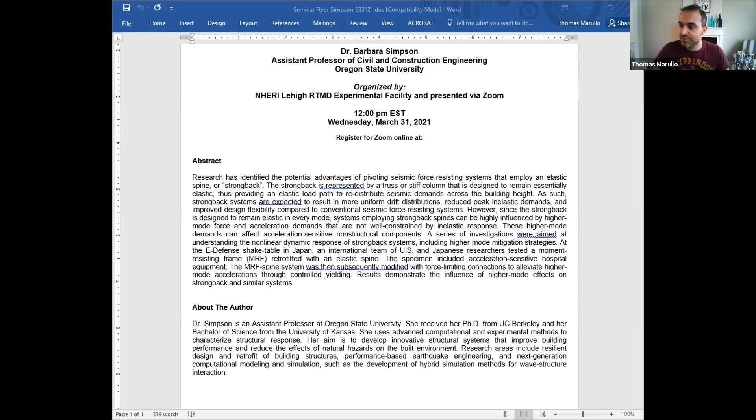Okay, let's try this. How about this? All looks good on my end. Awesome. So thanks so much for the introduction.

I'm going to be talking about a system that's rather near and dear to my heart. I've been working on it for quite some time. Today we're going to chat about higher mode force demands in systems employing elastic strongback spines. I tend to default to calling these systems with a strongback, but they're known by a number of different names depending on who you talk to, since there are a lot of other researchers also looking into this topic.

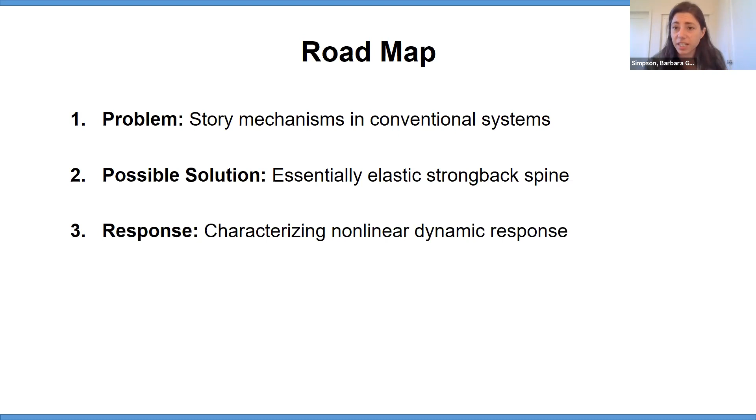To give a roadmap of what this presentation will cover: we're going to introduce the problem of story mechanism behavior, framed in terms of brace frame systems, though this is an issue seen in a number of other systems as well, as we'll see throughout. Then we'll look at a possible solution, which is where this Strongback concept comes in—I'll switch between calling it a Strongback and a spine depending on which project I'm introducing, since a lot of different research has looked into this topic. Then we'll characterize the nonlinear and dynamic response of these systems, particularly in terms of higher mode effects, and discuss ongoing research and applications of the system outside of how it was originally developed. So let's look at this first part: the problem of story mechanism behavior.

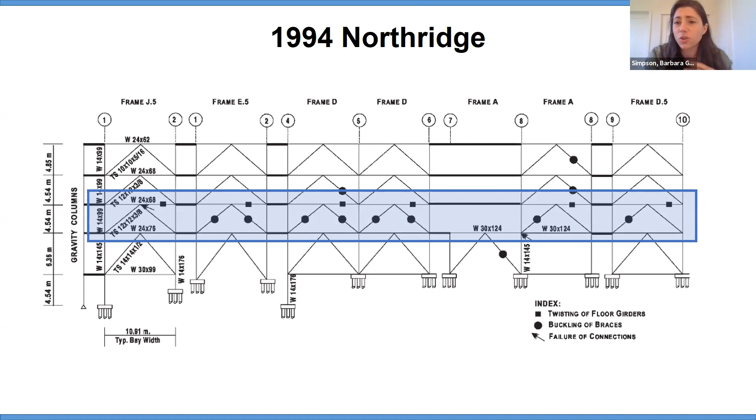This is a building with observed damage after the 1994 Northridge earthquake, a very conventional brace frame system. All these dots represent some sort of inelastic response, in this case brace buckling mostly, as well as some connection failures. Almost all of these dots are concentrated in the second story. This is pretty indicative of what we call story mechanism behavior, where you're utilizing the energy dissipation capacity of one story but not leveraging the energy dissipation in all the other stories of this 4-story building. This was the premise, if not the only reason, for this research project—developed during my PhD days.

When I originally started my PhD working with brace frames, it was still NEES rather than NHERI. This was a collaborative research project looking into vintage brace frames and their vulnerabilities. From this project, I became interested in story mechanism response and how to mitigate it. Throughout this project, we tested a number of brace frame specimens typical of vintage brace frame construction—those designed prior to the 1988 Uniform Building Code.

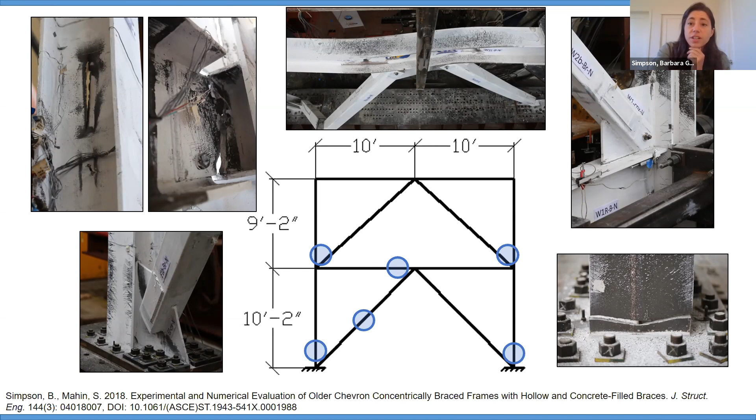This was the first test we did, a 2-story conventional brace frame test. We saw a number of different damage states and types of deficiencies. But something I want to point out is that when we did this test, most of the damage was concentrated in the first story—again, fairly indicative of a first story mechanism.

We did two sorts of vintage brace frame testing. If the first specimen formed a weak first story, the second specimen we tested—almost identical to the first, except we filled all the braces with concrete—gave us a weak beam mechanism where again almost all the damage was concentrated in the first story. This story mechanism behavior was really the precursor to a lot of the work I'm going to present today.

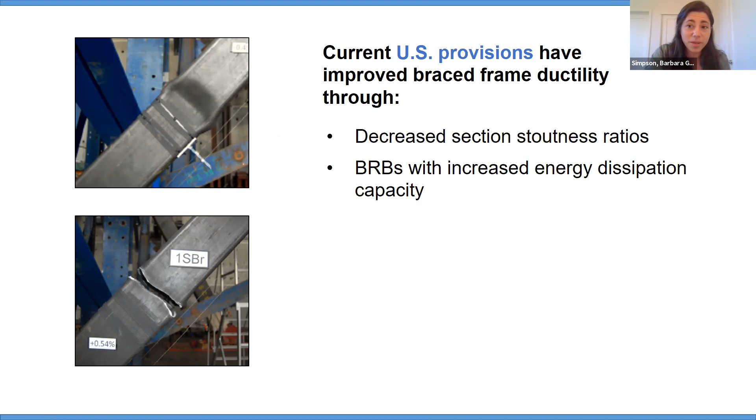If we take a step forward from vintage brace frame construction into modern US provisions for the seismic design of brace frames, we've done a lot. There's decreased section stoutness ratios to delay or even prevent severe local buckling and fracture. We've introduced buckling restrained braces, which have more stable energy dissipation capacity compared to braces that buckle. We've improved the detailing of our gusset plates to allow braces to buckle out of plane. We've also developed simplified capacity design procedures for more realistic estimates of member forces due to brace buckling and yielding.

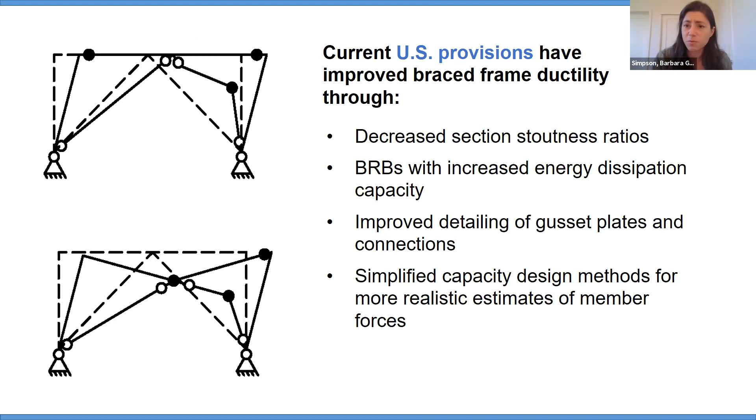And yet there's still this issue that brace frames, as well as other modern systems, despite these number of different improvements, still tend to form story mechanisms where the damage is concentrated in one or a few stories.

That's where this possible solution comes in—this idea of the elastic Strongback spine, which was really the brainchild of my advisor, Dr. Stephen Mahin, who actually passed away during the course of this research when I was doing my PhD. He, as well as others, had recognized that there were a number of different ways we could mitigate this story mechanism behavior and mobilize the full energy dissipation capacity of the entire system.

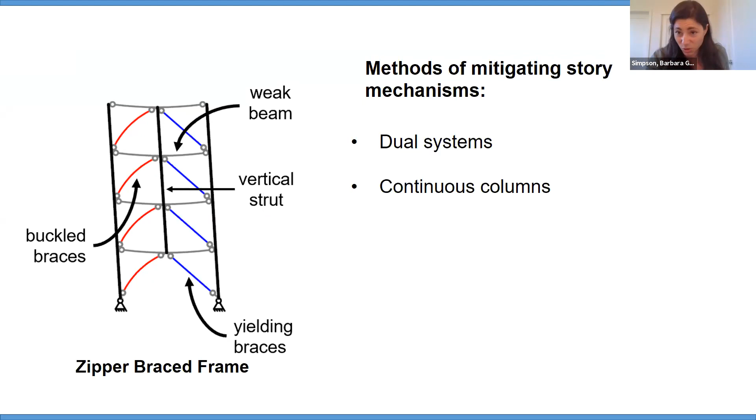If you look in the literature, there are a number of different ways that people have approached this problem. There are dual systems where you can use a secondary system to apply some elastic restoring capability. There's the continuous column concept, where a continuous column spanning over the height of a building—either a gravity system or something different—can span over the story mechanism problem. You could think of steel plate or concrete shear walls as a stiff, elastic vertical element that imposes a more uniform drift distribution, thereby delaying these story mechanisms, rocking and self-centering systems.

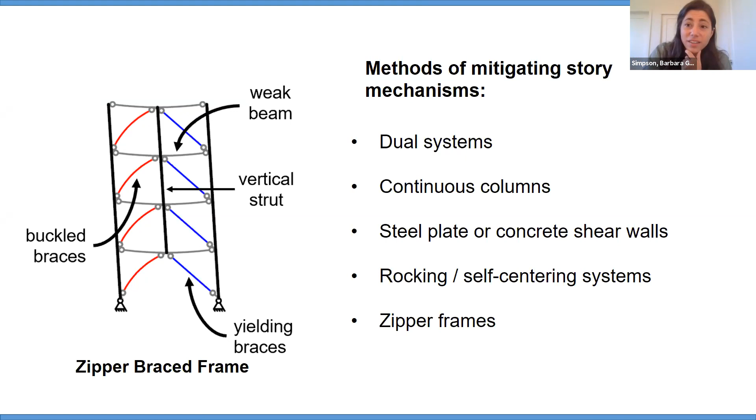The one on the right is sort of a precursor to what I've been calling the Strongback brace frame, but it's a zipper frame, which leverages the idea of a weak beam and a vertical tie strut. As the braces yield and buckle, it pulls down on this vertical tie to engage adjacent stories. So those were different ways that researchers have approached this story mechanism problem.

It's useful when introducing the Strongback system to think about why story mechanisms form. Let's take a brace frame, and let's say that each brace in every story has an equal strength or compression capacity C and an equal stiffness—the same braces used throughout the story—and it's subjected to some sort of seismic or inertial loading, let's say in this case an inverted triangular distribution.

When the braces in the story buckle, you're going to get a loss of both strength and stiffness in that story. Unless there's an appropriate mechanism to distribute these demands from the columns, those demands tend to concentrate in a single story and potentially lead to a story mechanism behavior. That's the reason why these story mechanisms are so prevalent in these brace frame structures.

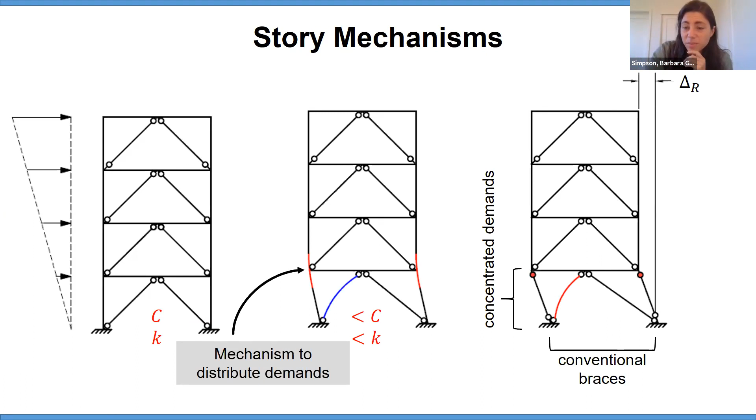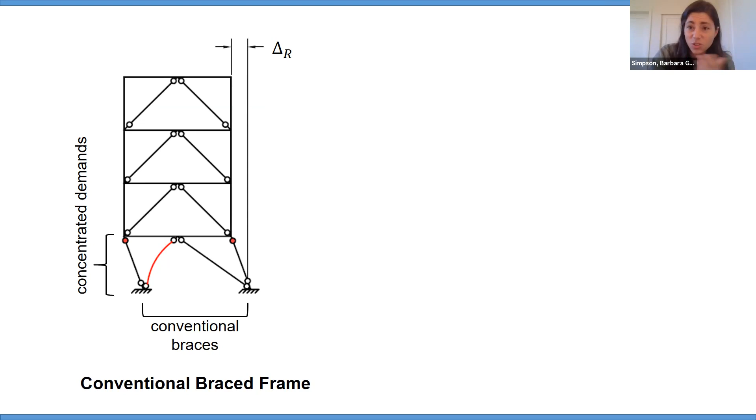This concept of a conventional brace frame has this tendency to form a story mechanism due to brace buckling behavior. The Strongback system introduces an essentially elastic mechanism that provides an elastic load path to distribute demands. This gray box area is a portion of the brace frame system that we're going to design to remain essentially elastic, and it's able to distribute the demands across multiple stories.

So instead of, on the figure on the left, 100% of the damage concentrated in one story, we utilize this elastic mechanism to distribute the demand across all 4 stories. Now you're getting a quarter of the damage distributed across this 4-story building. That's the concept of the Strongback brace frame.

Outside of that elastic Strongback, you design and detail the elements to yield and dissipate the seismic input energy. How the Strongback brace frame has traditionally been formulated is that you have these primary fuses, which could either be yielding or brace buckling behavior, as the primary energy dissipation mechanism. You could also have secondary fuses, for example flexural yielding in these longer beam lengths, that provide some secondary energy dissipation.

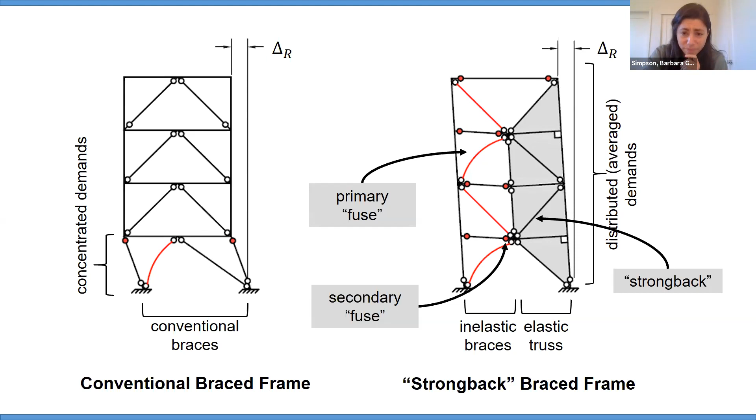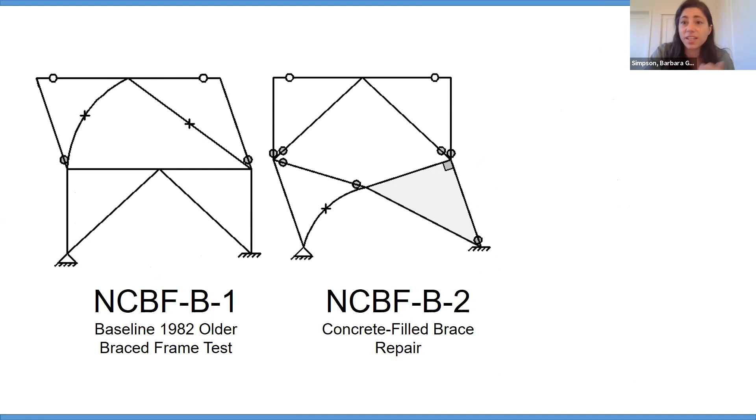Going back to this original research into these vintage brace frames, we had a first test that formed a second story mechanism, a second test that formed a first story mechanism, and the idea of this third test was to introduce this Strongback concept to distribute the demands over both stories. This gray triangle is what we're envisioning as the Strongback retrofit scheme.

How the Strongback works, if we look at it in terms of its kinematics: this gray box, the Strongback, is designed to remain elastic. Initially it was formulated as this sort of pivoting type motion, where this gray box pivots back and forth, with some primary energy dissipation. In this experiment, we were using buckling restrained, a single buckling restrained brace.

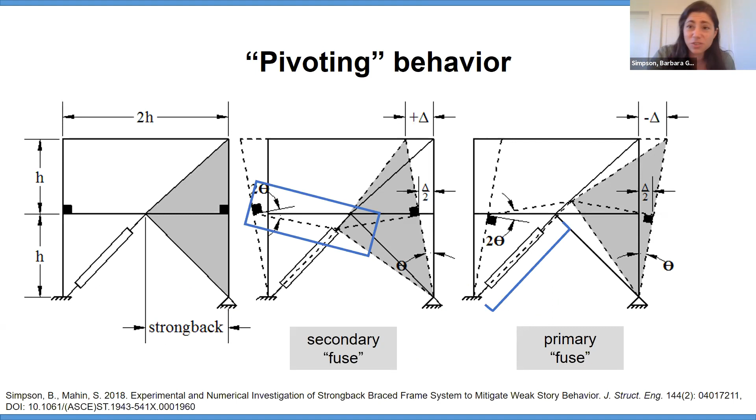Because that pivoting motion induces a vertical deflection in the beam, you could also say there's a secondary fuse in terms of flexural yielding in this beam length. We built and tested this at full scale, and this figure on the right shows that pivoting motion.

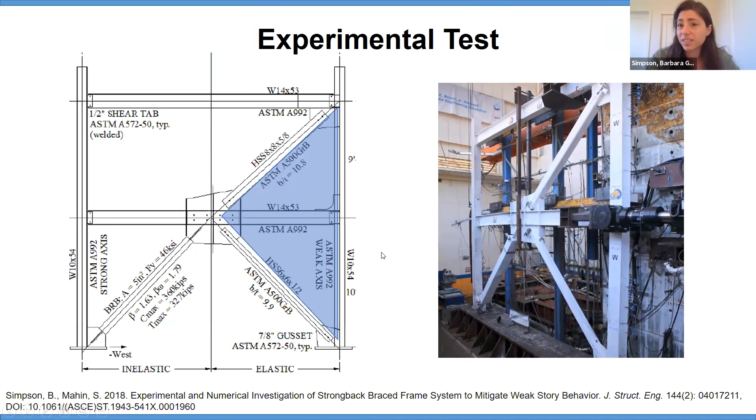We were successful in distributing the demands across both stories and achieving a more uniform drift distribution. So in that respect, this experiment was rather successful, and here we're seeing this Strongback, this elastic portion of the frame. This was a result of a number of different collaborations.

The vintage brace frame experiments were part of a much larger collaborative research program between Berkeley and the University of Washington. I happen to be the PhD student at Berkeley, and Andrew Sen was another PhD student at University of Washington. From this, there became interest in how we look at this system in terms of design development. AISC also became interested in this project.

That leads into the second portion of the research: how do you characterize these force demands in the Strongback spine? The reality is that the previous experimental test, although valuable in introducing the concept and showing it was successful in distributing story drift demands more uniformly within the building, didn't actually look at the dynamic response. It was tested in a quasi-static way, with no inertial effects, etc.

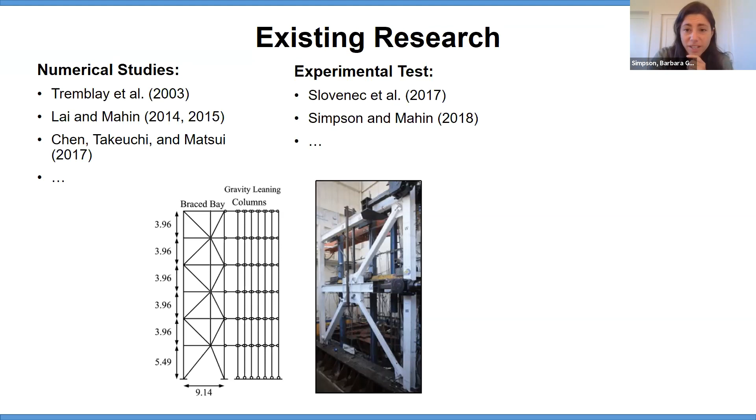There were some hybrid simulations conducted on a similar system, and then the experimental test I just introduced on this two-story Strongback system. At the same time, they were building and constructing very similar systems—this one's called the Masted Frame. You can see it looks very similar to many of the images I've shown so far, by tipping structures in Berkeley, California. So we were having numerical analyses, experimental testing, and construction happening simultaneously.

But there were still these really large questions on how these systems behaved, not only in the inelastic range, but in terms of their dynamics. It turns out that when you look at the response of these systems, they behave quite a bit differently compared to traditional conventional systems that are designed to be ductile and exhibit inelastic behavior in every mode. So this was a major question for us.

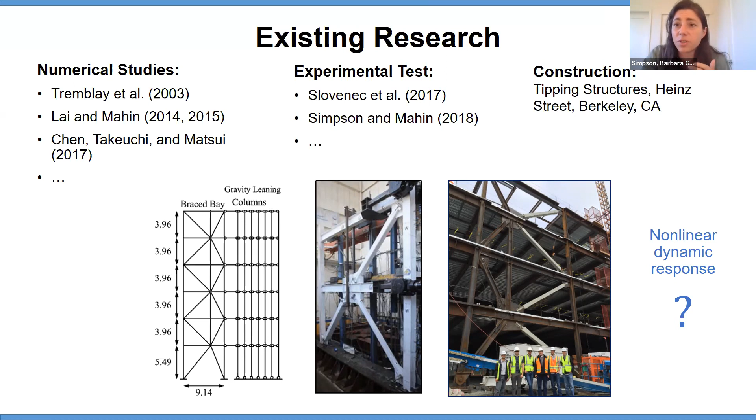I like to describe this with these figures. I didn't actually develop these figures myself—they're from a seismic design course taught at UC Berkeley by Steve Mahin. I've leveraged some of these images in presenting this idea, but this is not a new concept of looking at force demands in the elastic components, or the force-controlled actions, of a system.

Here, for example, we have a moment resisting frame where the plastic mechanism is typically flexural yielding at the ends of the beams, as well as potentially at the column bases. This moment frame is subjected to an inverted triangular distribution, and if we're interested in the moments in the columns, well, we know the flexural strength of these beams, so we can get the column moments.

However, during an earthquake, if those applied forces change, the moments in the columns will also change. As the inertial forces change again, those column moments also change again. So the elastic regions really may not be well constrained by flexural yielding or the formation of these plastic hinges. What you could potentially do is run a number of different nonlinear dynamic analyses for a number of different ground motions, collect them statistically, get their median values, and design for some statistical level of confidence for the moment in the columns to keep them elastic.

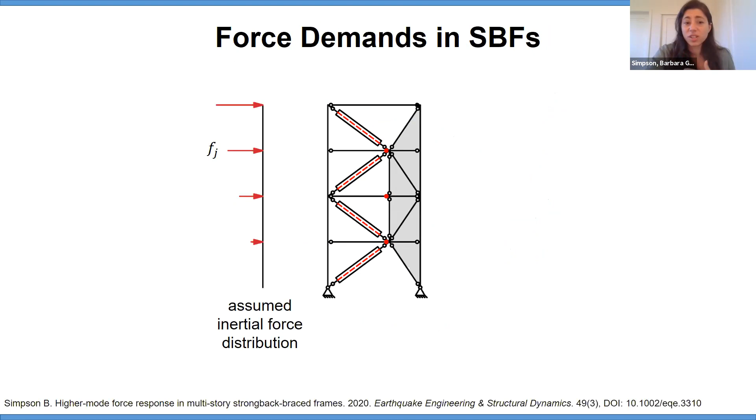That's the example of force demands in a conventional system that we very much know. The same idea can be extended to this Strongback system. If you take this Strongback system, you can apply some assumed inertial force distribution, resulting in some story shear demand. If we do a section cut through this Strongback brace frame, the forces in this Strongback brace, denoted by PSJ, will be some combination of whatever the inertial forces are in terms of story shear, and whatever forces are in the opposite—I call these typically nonlinear braces.

So the brace that's considered to be yielding in this case—what you can say is that the force in the Strongback brace is coming from a combination of story shears developing during the ground shaking from the inertial forces, as well as whatever axial force demand is developed in the opposite brace. Keeping that in mind, as that applied force distribution changes, the story shears will consequently also change. Even if that brace force is at its expected yield strength, if it's a BRB, the forces in the Strongback brace will also change. And if those forces change again, those story shears would change again, and the forces in the Strongback brace change again.

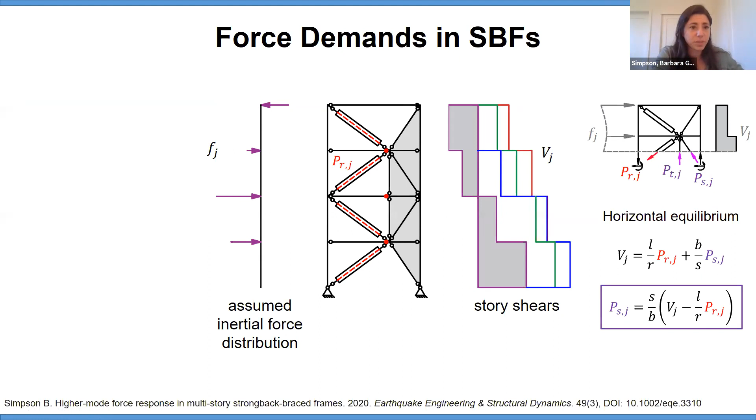What you end up seeing is that the force demands that are most significant, or could be most significant, in the Strongback portion of this system are actually ones that correspond to a force distribution where there's a reversal in the force. Here, there's a reversal of the force at the top story, or top floor level, which is typical of, say, a second mode distribution. So what you tend to see is that the higher modes actually play a very dominant role in the forces in the Strongback.

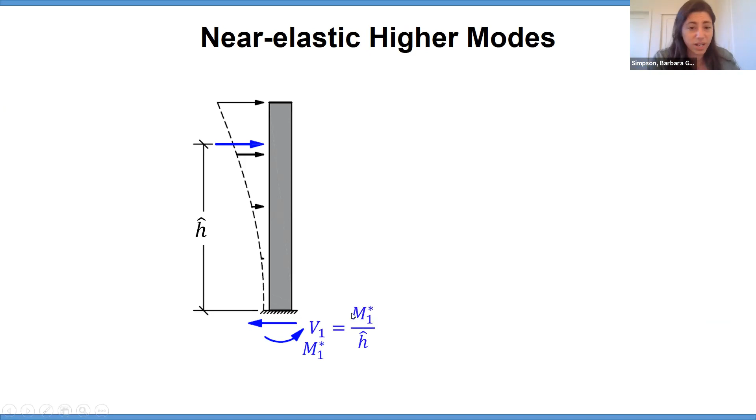There are a number of ways to explain this. I prefer this approach using a concrete shear wall. If we take a concrete shear wall with a first mode-like inertial force distribution, and have it form a plastic hinge about the base of the wall while the remainder stays elastic, then the moments at the base are constrained by the strength of that flexural hinging, and the base shear is that moment divided by the height from the base to the force resultant.

Now, if that inertial force distribution changes, say due to contributions from second or higher modes, that force resultant shifts downward because the second mode in particular tends to be associated with force reversal. Even if the moment at the base of the wall remains the same, because we're still getting flexural hinging at the base, the height to that force resultant becomes smaller, meaning the base shear can become larger.

So even though the moments at the base of this wall are well constrained by flexural yielding, the base shear, and even the story shears, are not so well constrained. Even the moments above the base are not well constrained. That's the same principle happening in the Strongback system.

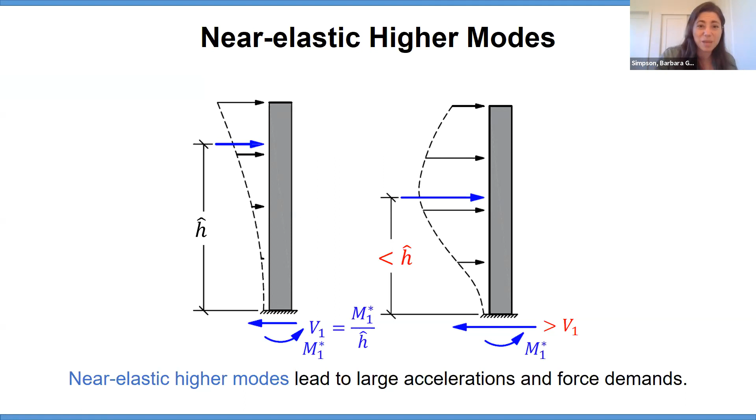In the first mode, you get limited forces due to the yielding mechanism—primary yielding in the braces, or secondary yielding in the beams—which limit the forces in the first mode. However, that nonlinear mechanism is not necessarily limiting the forces in the second and higher modes.

As you make this Strongback more and more stiff, you get an averaging of drift demands with story height. The tendency for a story mechanism to form, or for the system to concentrate damage and demands in a single story, is reduced, and you get a more uniform drift distribution.

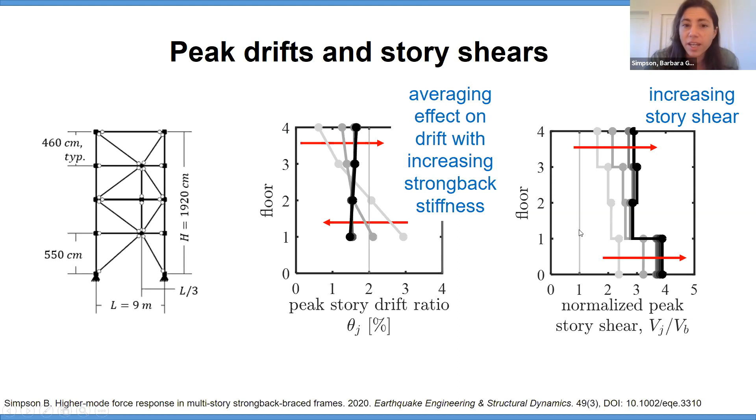But you'll also get increasing story shear and acceleration demands due to the presence of these higher modes. Those arise because the Strongback is designed to remain elastic in the higher modes, which differs from conventional systems where we expect inelastic response in all modes. As the Strongback becomes stiffer, the story shear demands will also increase.

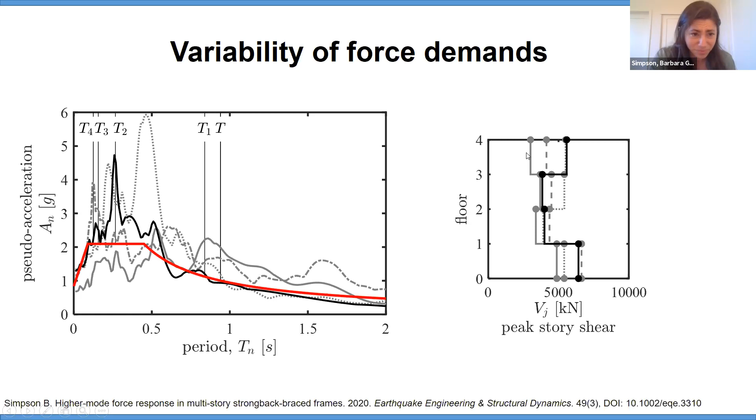They have fairly small spectral accelerations at the higher mode periods of the Strongback system, so you're not seeing as much of this higher mode story shear response. However, if your ground motion happens to have very large spectral accelerations at the higher mode periods, then those are going to be in the elastic range and contribute more to the story shear and acceleration response. So there's a dependency of the force demands that's highly related to the characteristics of the ground motion you're applying and how it interacts with those higher modes.

Now here's another example of a BRBF system, a buckling restrained brace system, where the inertial forces are decomposed into the first mode, second mode, third mode, fourth mode, and the total response. This is just to compare what you might get with the conventional system compared to what's happening in these Strongback elastic spine systems.

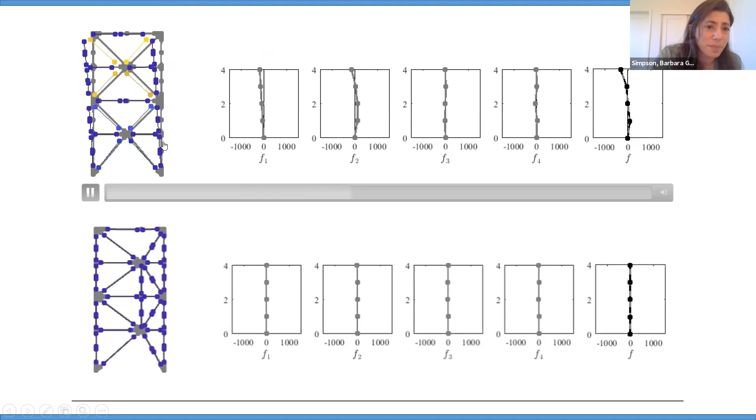What you'll see is that the BRBs yield, and you're getting primarily a first mode response, and the forces in the second and higher modes are still limited by the ability of the system to form yielding mechanisms in those higher modes. So you're not getting large higher mode response in the system, it's primarily operating in that first mode response.

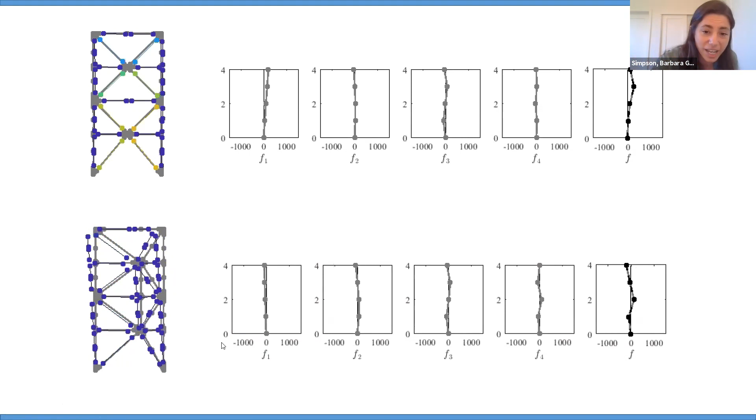What you end up seeing with the Strongback system in this figure on the bottom is that the BRBs, these nonlinear braces, tend to yield under what looks like a first mode force distribution. But if you look at when the Strongback is really activated, shown by these colors, it's really under that second mode distribution, when that second mode force distribution becomes dominant. If we replay this again, you're seeing that Strongback light up, the force demands in that spine light up, really when you're getting very large second mode force contributions.

This is just summarizing that: in the Strongback system, the BRBs are primarily engaged under that first mode type force distribution, but the Strongback, because it's elastic, is picking up very large second mode force distributions that it needs to be designed for in order to remain elastic. So the inelastic portions of the system are really being subjected to that first mode pivoting response, but the Strongback needs to be designed for everything else, meaning it needs to remain elastic under the second and higher modes.

So there's a number of different ways we can approach this problem. This is an idea of how to design the Strongback to have enough strength and stiffness, and one way to incorporate these higher mode effects is, of course, through nonlinear dynamic analysis.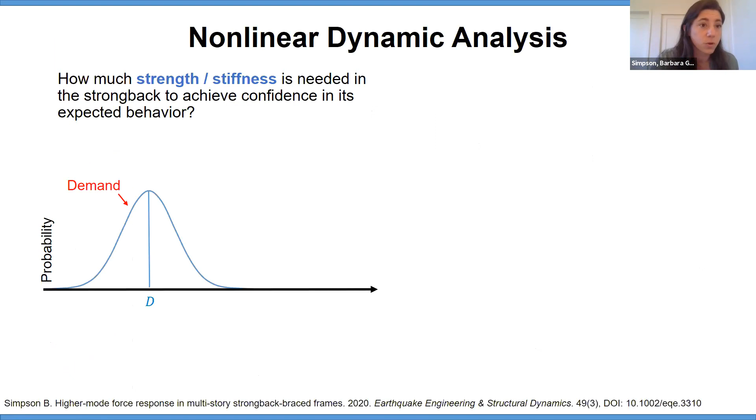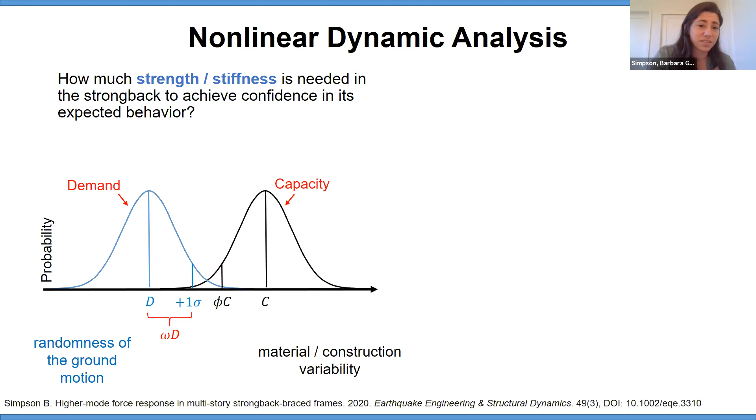You could run a number of different ground motion records, and they're all going to result in different force demands on the Strongback spine. Then, due to record variability, you take the median plus one standard deviation or some statistical confidence of that demand, and compare it to some capacity in the Strongback elements, accounting for material variability, construction quality, etc. That allows us to make sure that demand is less than that capacity, including variability in the ground motion record and associated force demands, as well as whatever capacity we're getting in the Strongback braces.

And then you could say we're just going to minimize the probability of having any inelastic response at some hazard level. So that's one way to approach this problem. Now, the issue with this is that a lot of the intuition can be lost in summary statistics, and this isn't necessarily a practice that would be relevant to every design office. So there's been a lot of work looking at how to approach this in terms of static analysis, so you don't have to do an entire nonlinear dynamic analysis.

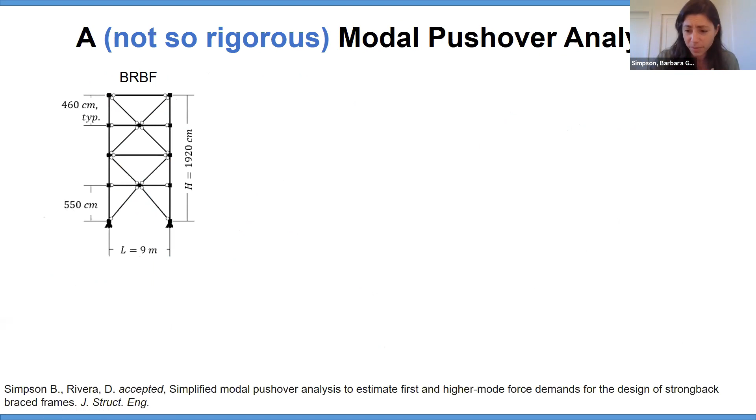Here's an example of a not so rigorous modal pushover analysis approach that describes the difference between BRBF behavior and Strongback behavior, to gain some intuition of the response. So you can imagine a typical BRBF.

If you do a pushover analysis in the first mode, all the BRBs are going to yield. With this base shear versus roof drift ratio plot, the forces after the BRBs yielded are limited. If you take that same BRBF and subject it to second mode response with a force reversal at the roof, the resistance is again primarily dependent on the BRBs, which yield, and the base shear versus roof drift response is again limited in the second mode. So this is that typical BRBF behavior.

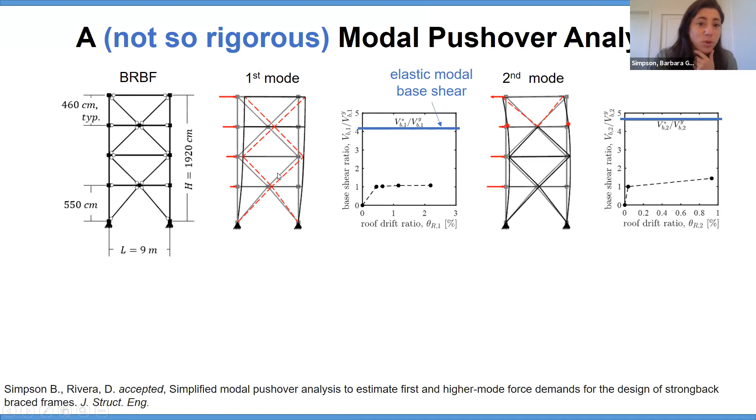If you look at the modal base shear in the first and second mode, if that system were to remain elastic, the strength in both the first and second mode of a traditional BRBF system is significantly less than that elastic level base shear. So for this typical BRBF system, you have this limited strength or very small higher mode contributions in the second and higher modes.

But with the Strongback system, you'll see that same response in the first mode, this pivoting type behavior. Subject the Strongback to this first mode pivoting response, and with the BRBs yielding and secondary flexural yielding in the beams, you still get a base shear response below that elastic base shear level. So the forces in that first mode are still limited by whatever your nonlinear mechanism is.

In the second mode, things get more interesting. You can still get yielding in the BRBs, but because of the presence of the Strongback, which is designed to remain elastic, you actually have very significant strength in what I'll call higher mode bending. If you look at the base shear from the ground motion, say an elastic response spectrum giving the base shear required for the system to remain elastic, that's this horizontal blue line, you'll see this system actually has significantly more strength than that blue line.

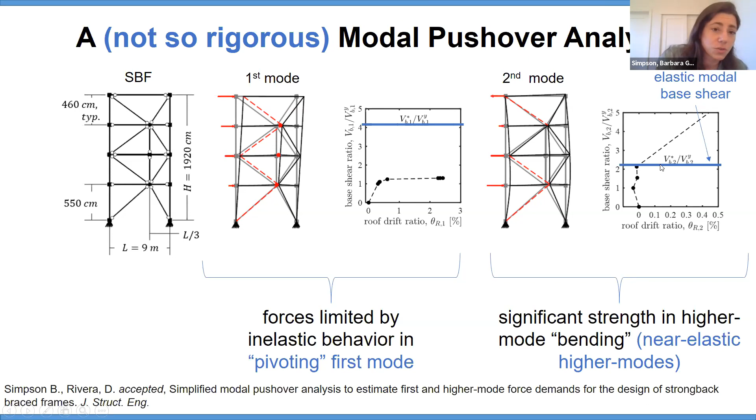One procedure that's been proposed: think about the first mode response as a plastic mechanism response, something that's yielded in the first mode where the forces are limited, so you form a pushover or plastic analysis in that first mode. Then think about the second mode as this near elastic or partial mechanism response - there are additional force demands picked up through this higher mode bending.

You can also think of other mode shapes - in this case a 4-story building with 4 translational modes - as being near elastic but with very small modal contributions. Here's the third mode and then the fourth mode, and then you can use modal pushover analysis to combine the response from each mode using some modal combination rule. Here I'm showing SRSS, a superposition rule where the higher mode contributions are superimposed upon this inelastic first mode.

I'd like to point out that there is a paper on this that has been accepted, but there are a number of theoretical inconsistencies with this sort of analysis approach.

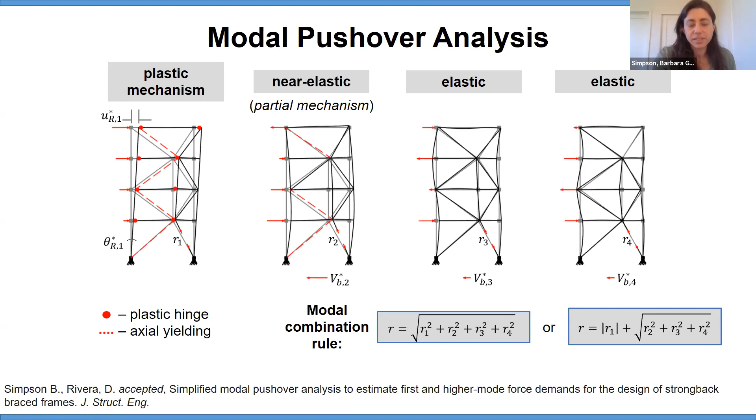For example, you're combining modal responses in the nonlinear range, which we know is not theoretically consistent. But what you'll end up seeing is that thinking about this inelastic first mode with a partial mechanism response in the second or even third mode, and then elastic response in the higher modes, actually gets you fairly close to what you see from the nonlinear dynamic analyses, despite its theoretical inconsistencies.

Another way of looking at this problem is through a modified response spectrum analysis. A number of different researchers have proposed methods for looking at other types of similar elastic systems, like concrete shear walls or rocking brace frames, in terms of a modal response spectrum analysis.

You can say that in the first mode, while you're achieving some inelastic response and limiting forces, maybe you can use an R=8 for a BRBF system. But in the second and higher modes, you're seeing these near elastic higher mode force demands, so you could potentially use an R=1 in the higher modes. There's been a number of different analysis strategies where you modify the structural model to then do these analyses in the second and higher modes. I've listed the work down below.

That brings me to this third part. I've introduced this idea of near elastic higher mode demands that are significantly different than what we think of with conventional seismic force resisting systems that yield in every mode, or form a mechanism in every mode, or can just form a story mechanism.

What you see in the Strongback system is these very large higher mode demands that can be associated with an elastic response. So when we start looking at applications and implementations, rather than describing the Strongback as inducing a pivoting type response with a more uniform drift distribution, I started thinking about the Strongback as more compensating for anything other than this pivoting first mode response.

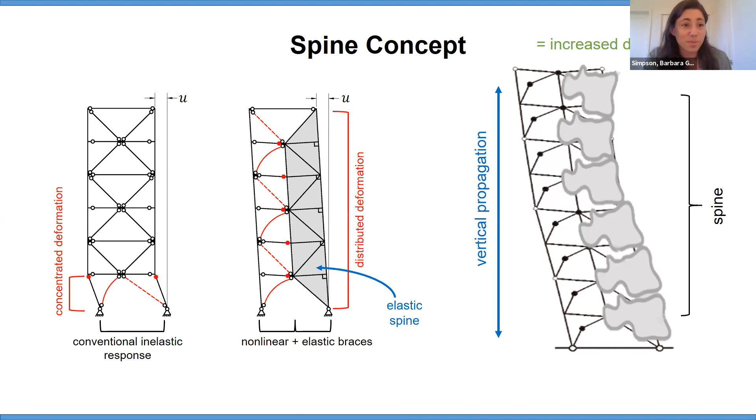So you can think of this Strongback more as a spine that propagates demands through bending in the higher modes, thereby providing some increased design flexibility.

Rather than thinking of the Strongback as just this singular brace frame system, there was an effort to start extending it to other types of systems. For example, in a concrete shear wall, you can have a wall pinned at its base that is really responding in much the same way, with much the same design premise, as a Strongback system.

So you can start saying that these near elastic higher mode demands are actually very similar across all of these systems, and that each of these actually belong to a family of, say, elastic spines.

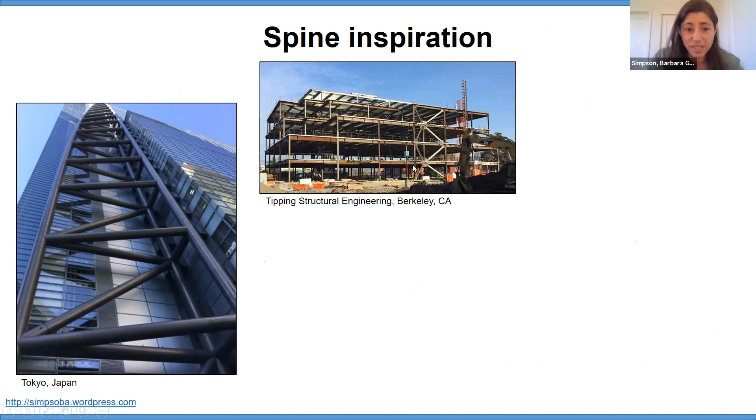There's a number of different examples of spine inspiration in practice. This is a photo I took on my very ancient iPhone when I was in Japan a few years ago, where you could take an elastic exterior spinal system and think about it in terms of a tall building. I already mentioned the mast or Strongback concept implemented by Tipping in Berkeley, and then there's also the Tesla Gigafactory done by Gregory Luth and Associates with Exponent in Reno, Nevada.

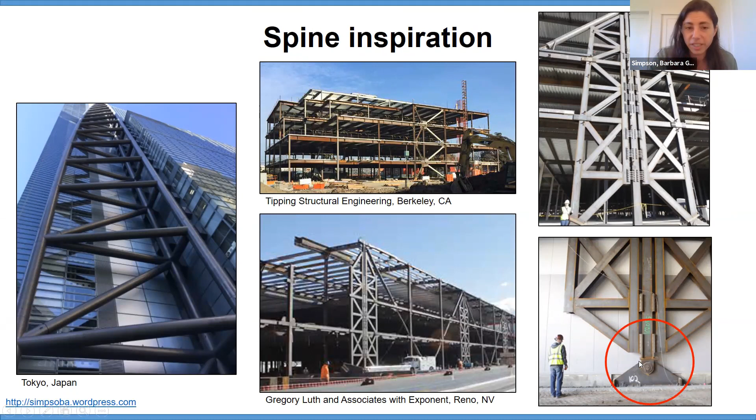Something I like to point out with this last one is that they all have this ability to release moment about the base. So you're talking about a stiff elastic system that's then pinned about the base of the Strongback or spine. It's not intended to provide supplemental lateral strength, it's more to engage the building more uniformly over the full building height. There's been a number of these ideas of pinned base spines, for example, as a concrete shear wall.

And we can see this sort of connection at the base, this very nice steel machined pin. And then you can have some shear yielding elements that provide energy dissipation. So these are all in the family of these elastic spine systems.

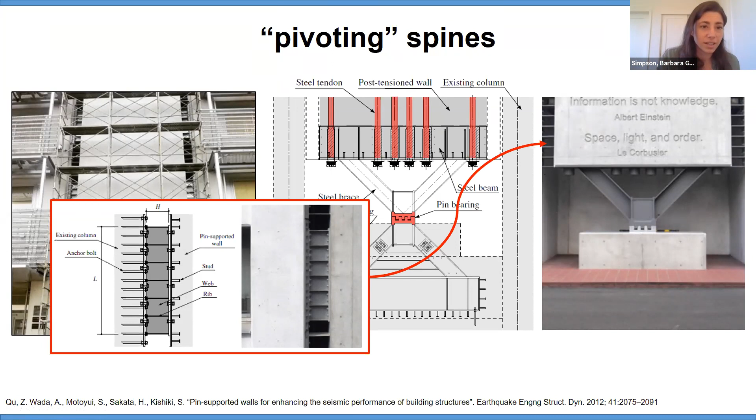And that's where this new project comes in, a collaborative project called the Frame Spine System with Force Limiting Connections. That's between LEHIGH, myself at Oregon State University, the lead PI Larry Fahnestock at University of Illinois, and a number of Japanese collaborators.

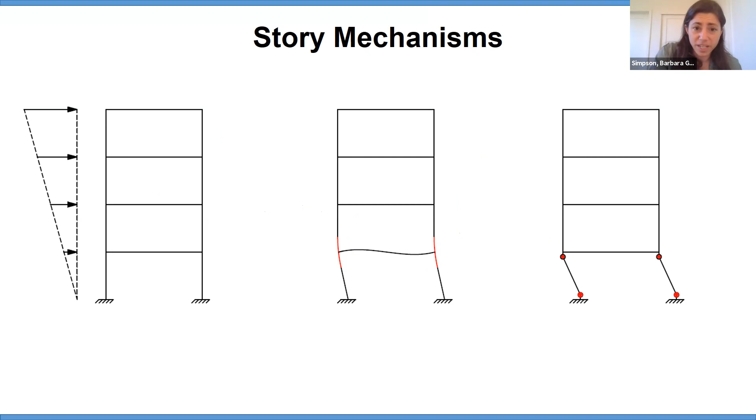So we can extend the idea of the Strongback system, which was initially developed for brace frames, into the concept of delaying or preventing story mechanism response in a moment frame. And the same concepts still apply.

You still need a mechanism to distribute demands. And often we think about that in terms of the strong column, weak beam design requirement, to limit concentrated demands in one or a single story.

So you can imagine taking that moment resisting frame, and now introducing an elastic vertical element to distribute those demands, which again is this spine concept, pinned at its base. It provides an elastic load path to distribute demands uniformly, and is designed to remain essentially elastic.

So you have this spine that can distribute demands more uniformly with building height, but you also still have these higher mode effects that tend to come into play.

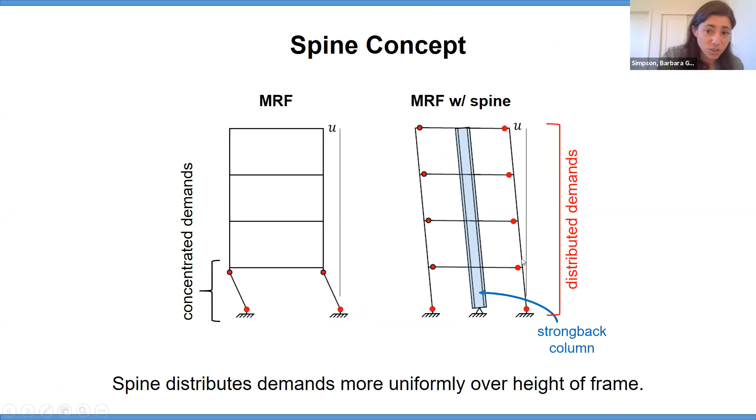I'm just going to show the same slide I showed previously. You have the effects of the higher modes that are not well constrained by the nonlinear mechanism. So even though you have yielding, in this case in the base MRF due to flexural yielding at the end of the beam, you still have these higher mode effects that are not well constrained by that base MRF yield mechanism, that sidesway mechanism.

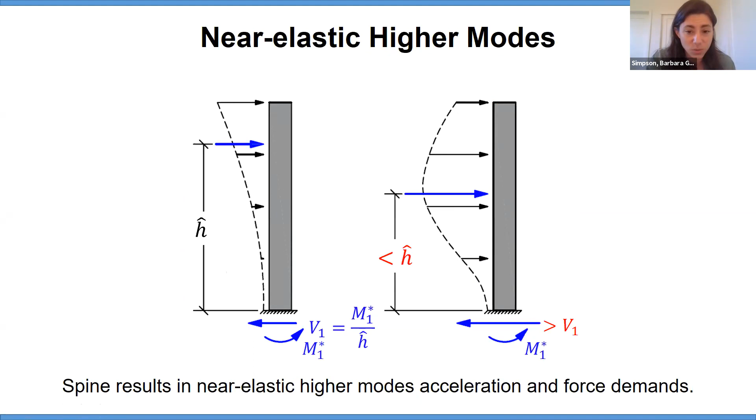So to mitigate these higher mode demands, a lot of work was done at LEHIGH to develop a force limiting connection. A force limiting connection is a yielding connection that's sandwiched between, in this case, the base moment resisting frame, but really any conventional system, and an elastic Strongback spine.

So you use this yielding component that limits the transfer of force demands from the elastic spine to the base system, in this case an MRF. And because it limits that transfer of forces, it can reduce the acceleration and force demands we're seeing from these very significant higher mode effects, these near elastic higher mode effects.

And then there were a number of other force limiting connections also developed by LEHIGH. In this case we can see a tongue FLC, which again is this yielding mechanism between the spine and the MRF, designed to reduce these acceleration and force demands.

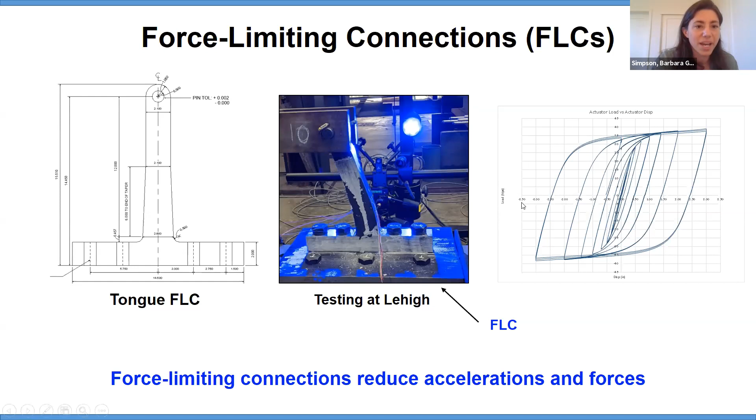So now we can say, we can have a spine designed to remain elastic, to induce more uniform drifts, but we can also control our accelerations by having a yielding component between that spine, that Strongback system, and the base frame.

As part of this study, we sought to test this hybrid spine force limiting connection, or FLC, idea. We were able to leverage an existing shake table study being conducted by the Japanese at the E-Defense shake table. The original study was testing a 4-story moment resisting frame connected through this walkway to a 3-story base isolated building.

And both structures had non-structural hospital equipment that were acceleration sensitive, so we could look at the impact of having the higher mode accelerations.

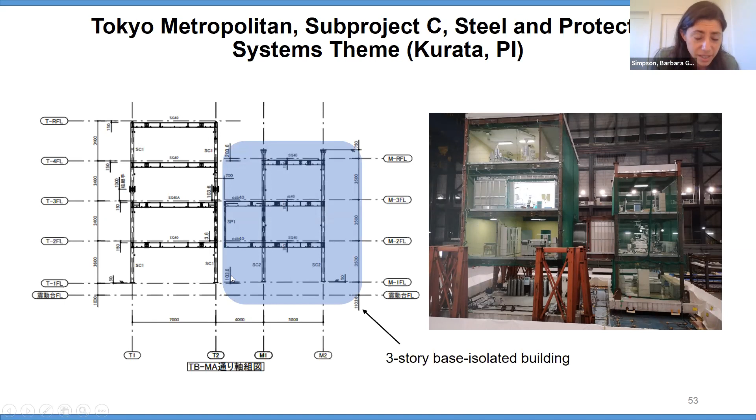So what we did in the study is make use of this existing 3-story base isolated building, and we locked the isolators, then retrofitted it with our spine force limiting connection idea. So if this was the original 3-story building with base isolators, we added a 4th story to better look at these higher mode effects.

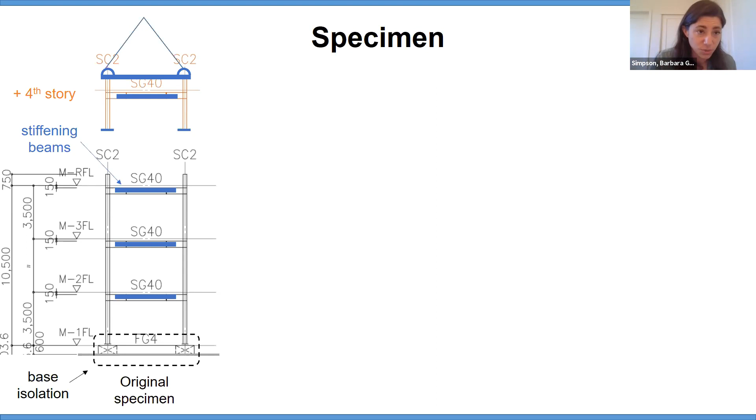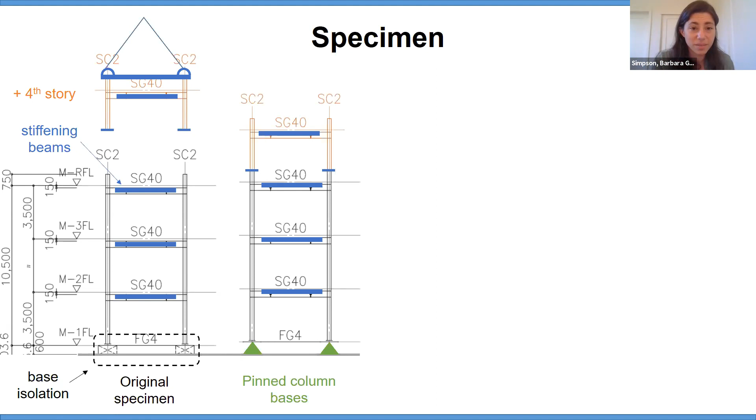We also added stiffening beams that allowed us to connect the spine to the MRF and distribute those demands a little bit better. We also pinned the column bases in the base MRF to really induce a severe story mechanism, because we wanted to look at a system with large higher mode effects and a severe story mechanism tendency. The higher mode effects are due to the inclusion of an elastic column—the Strongback spine connected at all 4 floor levels to the base MRF—which induces the higher mode force demands.

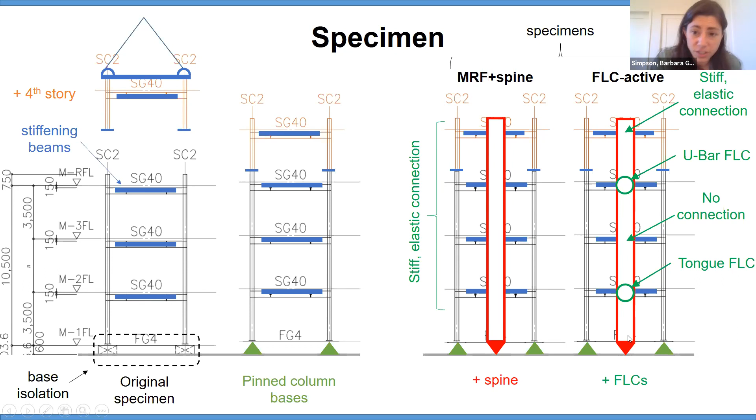We also added a second case with force limiting connections between the spine and the base MRF, using U-bar FLCs developed by Nippon and tongue FLCs developed at Lehigh. Between these two specimens: the spine plus base MRF case where the FLCs were locked and not engaged, acting as a very stiff connection between the spine and the base moment resisting frame; and the FLC active case, with deformable yielding connections to mitigate higher mode acceleration demands between the spine and the base MRF.

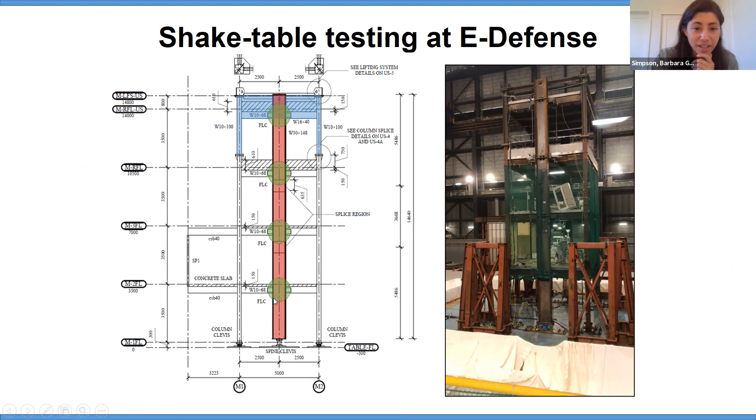This went from concept to actual testing, an experiment we completed in December of last year. You can see the stiff, strong, elastic Strongback spine with the potential FLC locations and the additional fourth story.

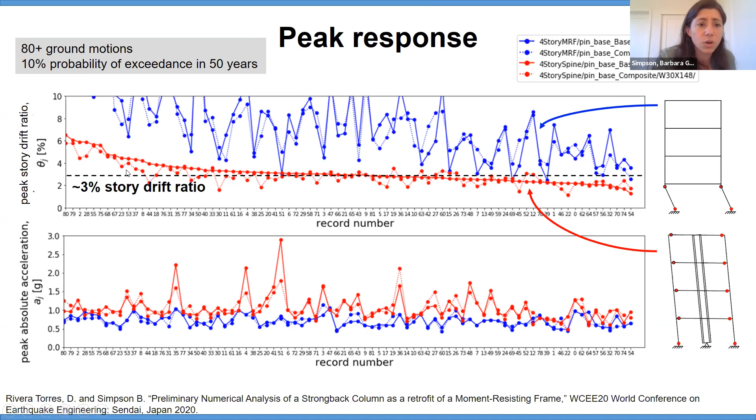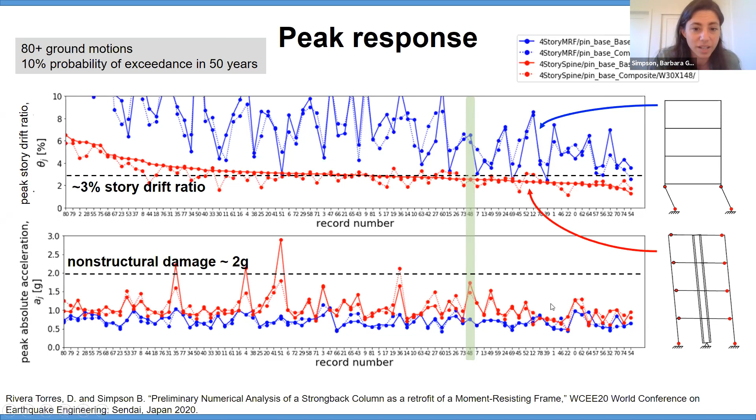So we selected a ground motion to avoid huge story drifts, wanting to be safe during the shake table testing—some story drift ratio less than 3%. We were also interested in accelerations associated with non-structural damage, since these structures originally had hospital equipment, so we wanted to induce rather large higher mode acceleration demands around 2G. We ended up selecting ground motion 48, a Northridge record that gave reasonable drifts so we were safe, but also let us observe large higher mode contributions from implementing this spine. The blue line is the base MRF, which has a severe story mechanism tendency limiting the acceleration response, but when you add the spine, you pick up those higher mode accelerations shown in red on the bottom plot. So we selected that ground motion to look at the higher mode response.

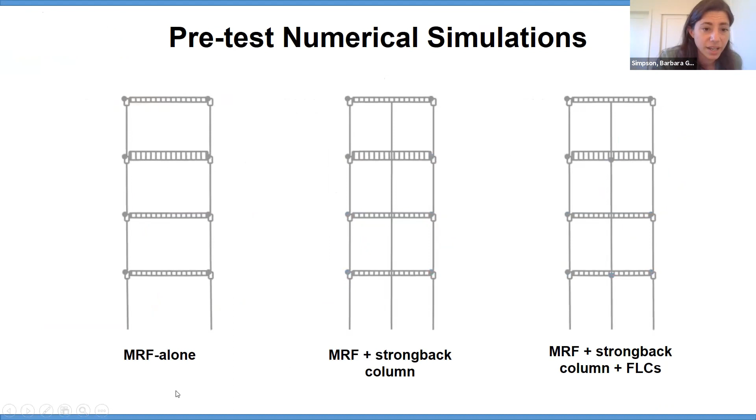That allowed us to look at different ground motion characteristics, since that record didn't have as large contributions near the second mode period. This is an example of pre-test numerical simulations of the MRF by itself, the MRF with the addition of the Strongback column, and then the MRF with the Strongback and these force limiting connections. With the MRF alone, you get a really severe first story mechanism tendency, shown in the figure on the left, which is beyond the range of the numerical model but associated with collapse in the structural model.

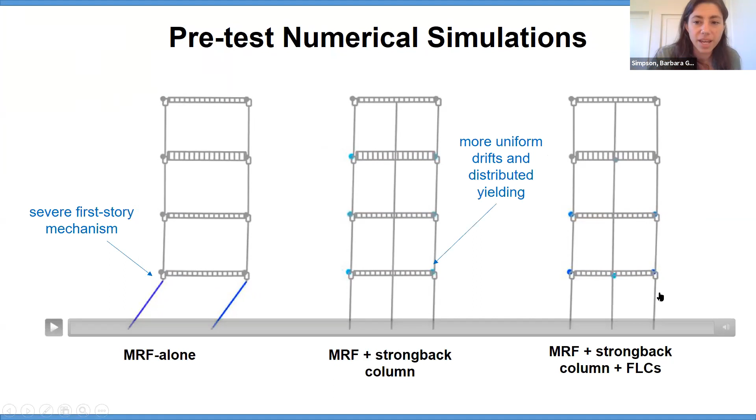With the spine, you get a much more uniform drift distribution across the building height. So peak drift demands are decreased, but you're seeing damage occurring in every story. You see something similar here too: a uniform drift distribution, slightly larger peak drift demands, but also yielding at these FLC locations, which helps mitigate some of the higher mode acceleration effects that can affect very sensitive non-structural components.

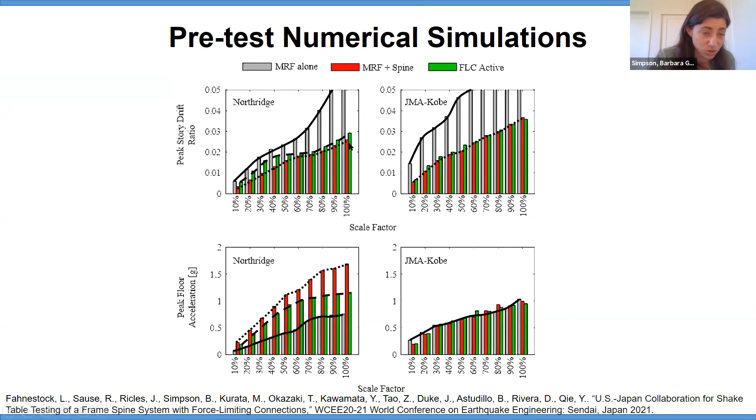When we look at the peak story drift ratio for the Northridge and JMA Kobe earthquakes, comparing the peak response for each scale factor, where those ground motions were scaled from 10% to 100%, this black line shows the MRF, this dotted line shows the MRF with the spine system, and this dashed line shows the contribution from the FLCs.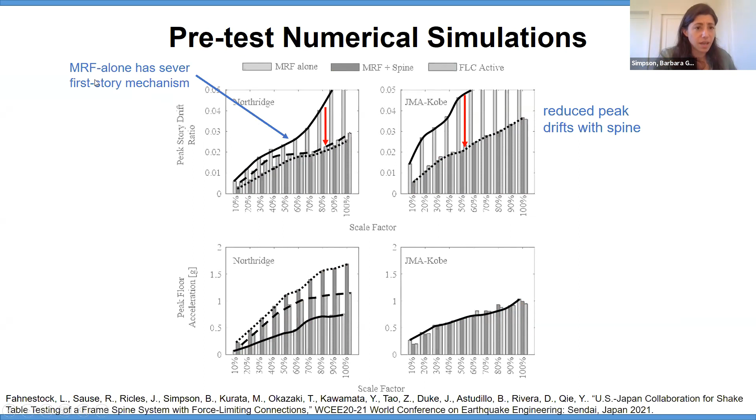Numerically, we see severe first story mechanism in the MRF by itself. But when we add the spine, even with the FLCs, although the FLCs do result in somewhat larger drifts than without them, we don't see the large drifts we saw for the MRF alone. There's a really vast reduction in that peak story drift demand, because of the presence of the spine, which distributes demands more uniformly.

When we add the FLCs, that force limiting connection between the spine and the base MRF, the higher mode accelerations are reduced compared to the spine by itself. But that's highly dependent on which ground motion we're looking at. For the Northridge record, there's a definite decrease in higher mode accelerations, since it has a lot of spectral content at that second mode period, but you don't see that in the JMA Kobe record, because it tends to have much smaller intensities near that second mode period. So that decrease in accelerations really does depend on the ground motion input.

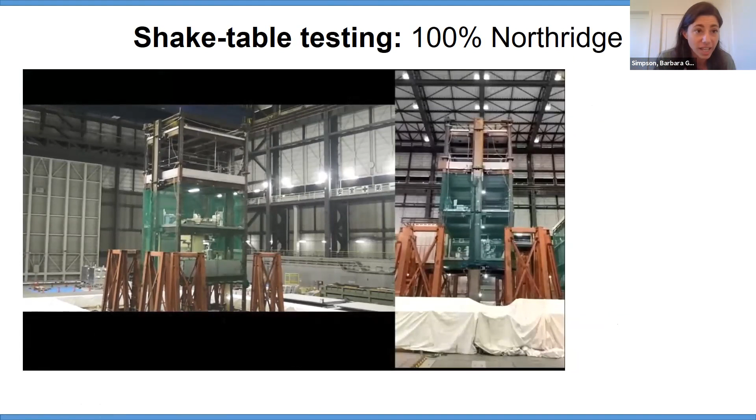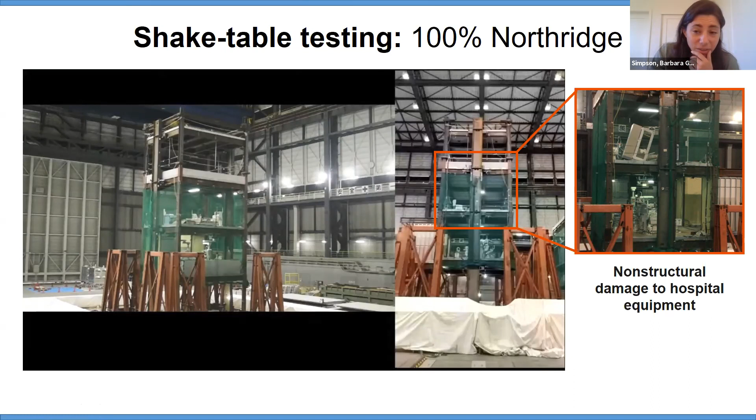This is just the test from last December, with 100% Northridge. The FLCs are not active in this case, and you can see the non-structural components. We got fairly large acceleration demands with the spine directly connected to the MRF, without that yielding force limiting connection, and you can see here some toppling of equipment, which could be really disastrous for hospital buildings. So acceleration-sensitive hospital equipment is shown here.

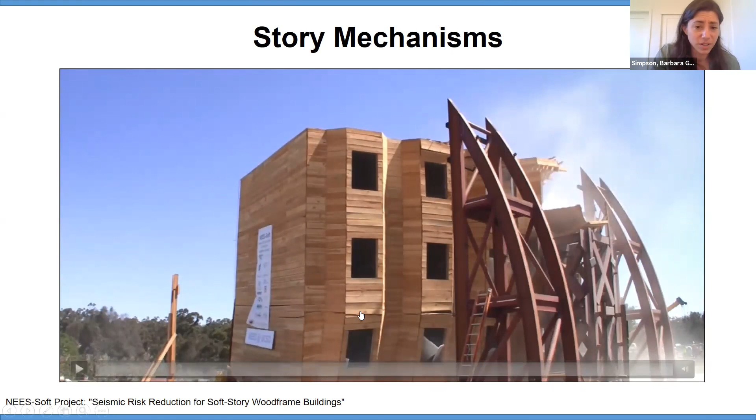These ideas of spines, of an elastic component to distribute drift demands more uniformly with building height, have sort of caught on in this world. This is just another example of a story mechanism. It's not just a problem in steel systems, though I introduced this starting with steel. This is a problem we can see in a number of other types of lateral force resisting systems, regardless of material. These soft story problems are not just problematic in steel brace frames.

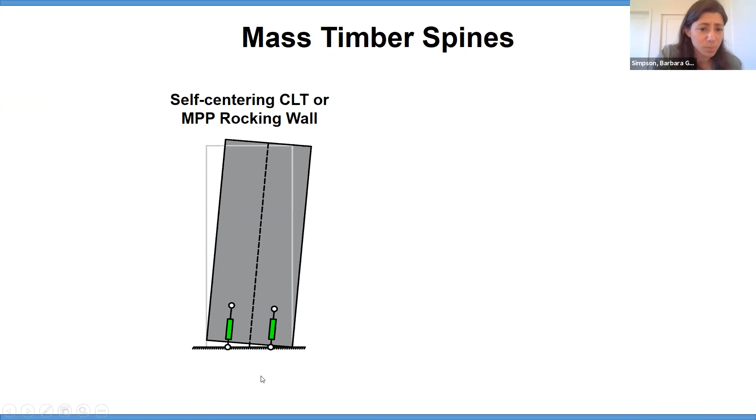We can also see their influence in mass timber systems or wood systems. So you can imagine a mass timber spine. On the left is a self-centering cross-laminated timber or MPP rocking wall, something that uplifts about its base, where the remainder of that spine is designed to remain elastic. Then you can have supplemental energy dissipation provided by BRBs or some sort of steel energy dissipator. Or, as we've discussed during this presentation, a pivoting CLT or MPP spine that's pinned at its base, pivoting back and forth about a pinned base connection, with additional steel energy dissipators in this system.

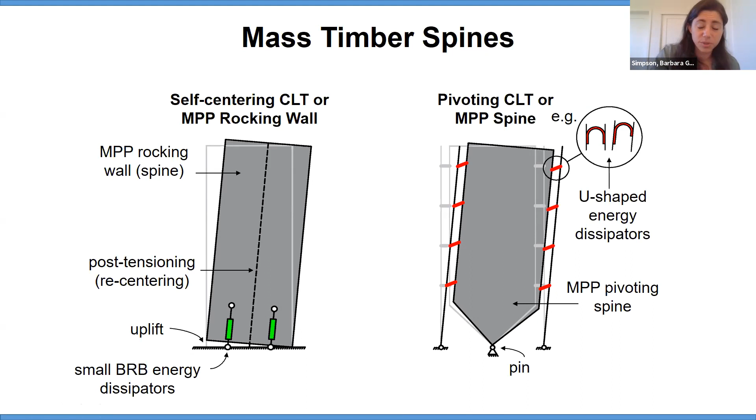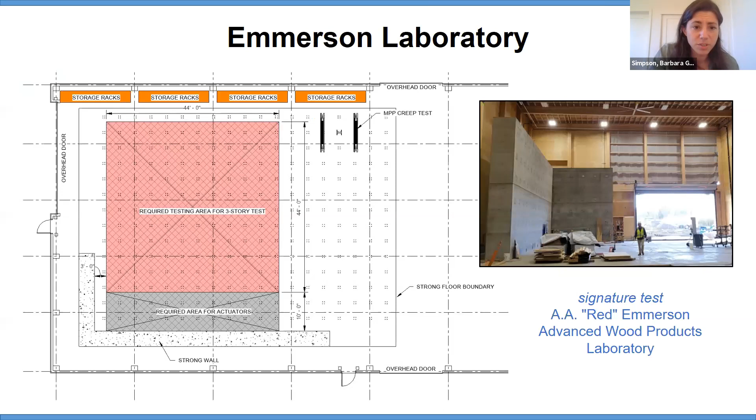This conceptually is very similar to what we've previously introduced in terms of that Strongback column coupled with a moment resisting frame, or the Strongback braced frame, where you have a Strongback truss coupled with a conventional brace frame. This is something that's a signature test we're looking at here at Oregon State. We have a brand new Red Emmerson Advanced Wood Products Laboratory.

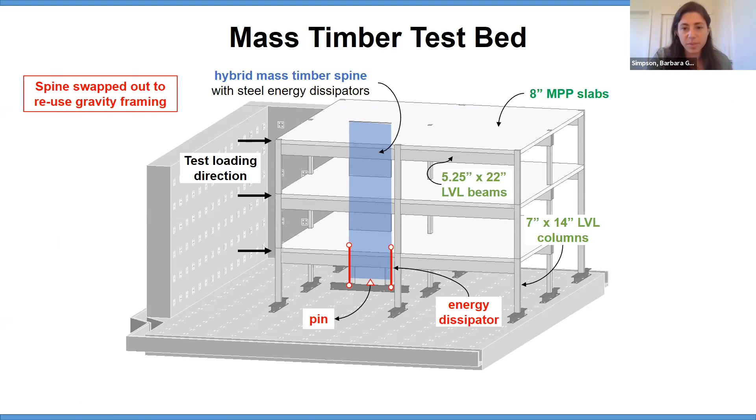In that lab, we're planning on testing this 3-story mass timber system with a spine that's able to swap out from the gravity framing. It's a test bed of sorts, where we will test a number of different hybrid mass timber spines with steel energy dissipators. Those tests are forthcoming.

We have a number of graduate researchers on this project, as well as a postdoc who have been really fantastic, and a number of partnerships and linkages with ongoing work with the National Science Foundation, as well as the Tallwood Design Institute.

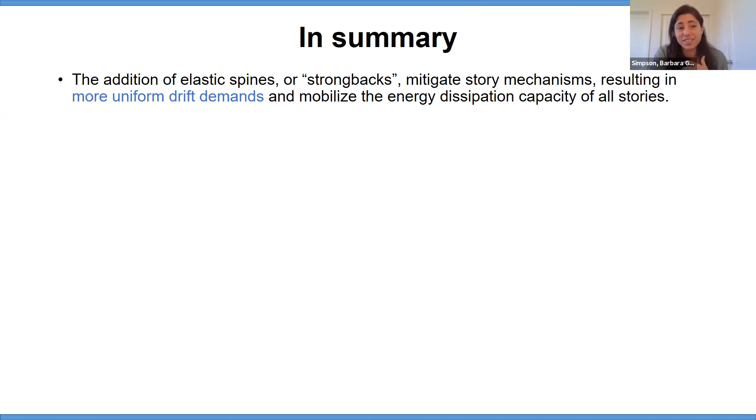In summary, the addition of these elastic spines, which are stiff vertical elements designed to remain elastic, can really mitigate story mechanisms and result in a more uniform drift distribution. You also get to utilize the energy dissipation capacity at every story, at every floor level. But they also result in these near elastic higher mode force and acceleration demands.

If you're going to design the Strongback to remain elastic in every mode, you need to consider these very large force demands that will accumulate in the Strongback spine, and they're highly dependent on the ground motion input.

You can introduce a force limiting connection idea to mitigate these higher mode demands, some sort of controlled yielding mechanism that limits transfer of forces between your elastic spine and whatever base frame you're connecting it to. Provided you tune those FLCs appropriately, you could decrease these higher mode accelerations and still control drift response.

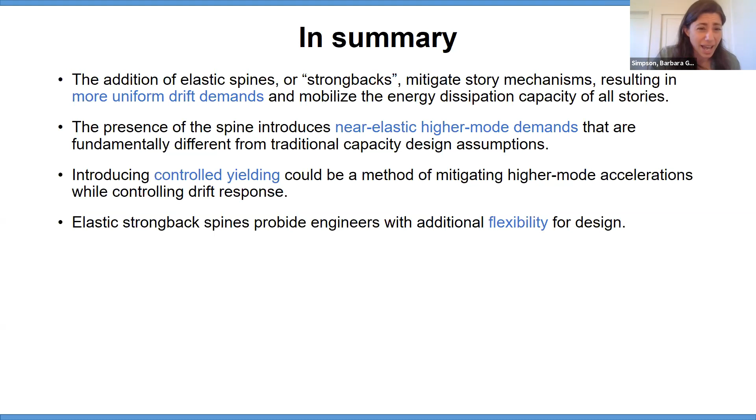Finally, I want to say that these elastic Strongback spines do provide added flexibility. Because it's an elastic lateral force path, you can think of them as being able to bridge across irregularities. So if you, as an engineer, want to remove any of the nonlinear elements or bridge across mass or stiffness irregularities, the Strongback allows you to do so.